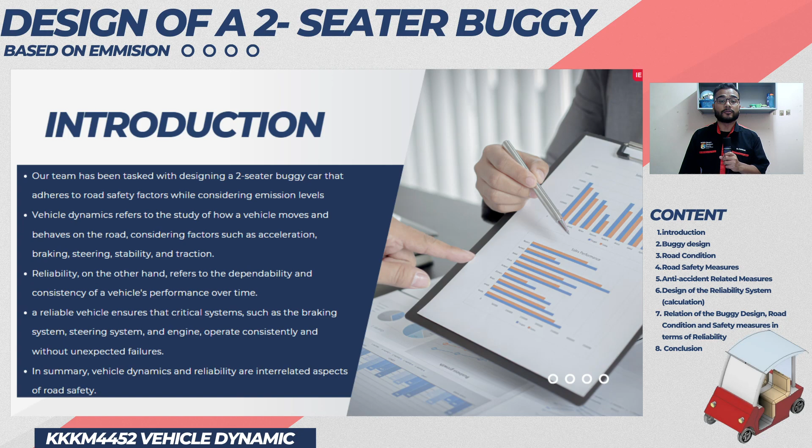The design of the two-seater buggy based on the emission: when comparing electric drive to internal combustion engine, the former has a much lower carbon emission. For a lifetime fuel consumption of ICE, 70 tons of carbon dioxide is released into the atmosphere, whereas an electric car like Tesla only produces 30 tons of carbon dioxide, assuming the current electrical grid in Malaysia.

When in use, electric drives do not produce any emissions, while ICE burns fossil fuel and emits harmful gases such as carbon dioxide, nitrogen oxide, and soot directly into the atmosphere. The carbon emissions associated with electric drive depends on the source of electricity used to charge the batteries.

If the electricity comes from renewable sources like solar, wind, or hydroelectric power, the emissions are significantly reduced. However, if the electricity comes from coal or fossil fuel, the emissions associated with charging the electric vehicle will be higher. It is important to note that by looking at the trend, electric generation is gradually becoming cleaner, with more renewable energy sources being implemented, further reducing the carbon footprint of electric vehicles over time.

The material used to build the frame of the car is made of lightweight materials. By choosing a lightweight material, we can significantly reduce carbon emissions. Lightweight materials such as aluminium, carbon fiber, and high-strength steel require more energy during manufacturing compared to traditional steel frames.

However, it's important to note that these alternative materials can offer weight savings, which can result in improved average fuel efficiency. This fuel efficiency improvement can balance the higher energy requirements during manufacturing, resulting in overall environmental benefits. Lighter frames contribute to improved fuel efficiency and reduce emission during the lifetime usage of the buggy.

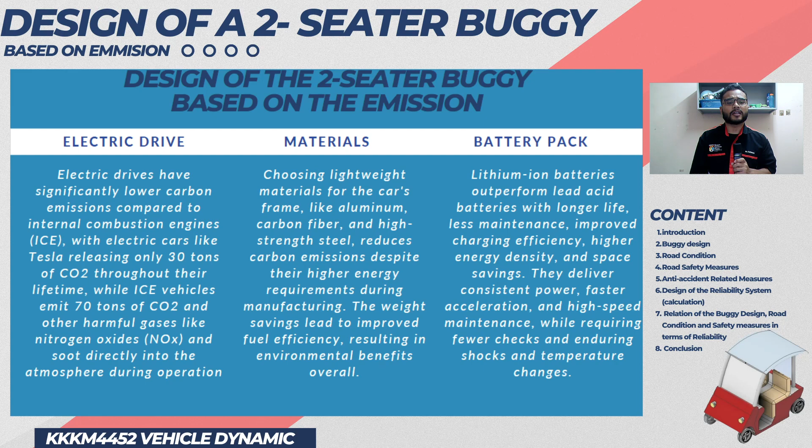Maintenance is also reduced because lithium-ion batteries do not need to be checked that frequently, and the capability to withstand shock and temperature increase are a plus. The location of the battery pack, which is under the seat, also lowers the center of gravity of the buggy, thus improving stability.

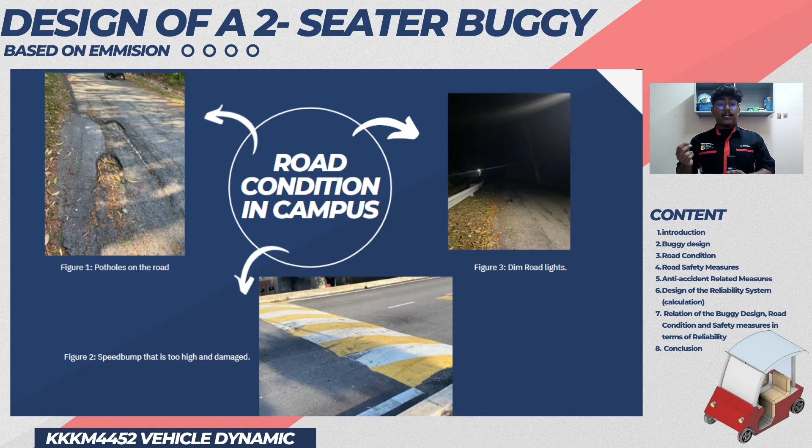Next I'll be presenting about road safety measures by road users and public pedestrians. The first safety measure for road users is obeying traffic laws. Traffic laws are in place to effectively regulate and control the movement of vehicles, leading to a safer and more structured road environment. Compliance with the law significantly contributes to the safety of both oneself and others on the road. Speed limits, determined by factors such as road condition, visibility, and the surrounding environment, should be strictly followed as they serve to prevent accidents.

The second road safety measure for road users is avoiding distraction. Eliminating distraction while driving is an essential road safety measure that greatly diminishes the chance of accidents. Distraction diverts a driver's attention away from the road, impairing their capacity to react swiftly to potential danger. It is crucial for road users to prioritize attentiveness and minimize distraction to ensure a safe driving environment.

The next safety measures are for public pedestrians. The first is to use designated crosswalks. Giving priority to the use of designated crosswalks is an essential road safety measure that pedestrians should prioritize. Designated crosswalks are clearly marked areas on the road that offer a safe and visible path for pedestrians to cross. By utilizing these designated areas, pedestrians enhance their visibility to drivers and assert their right of way.

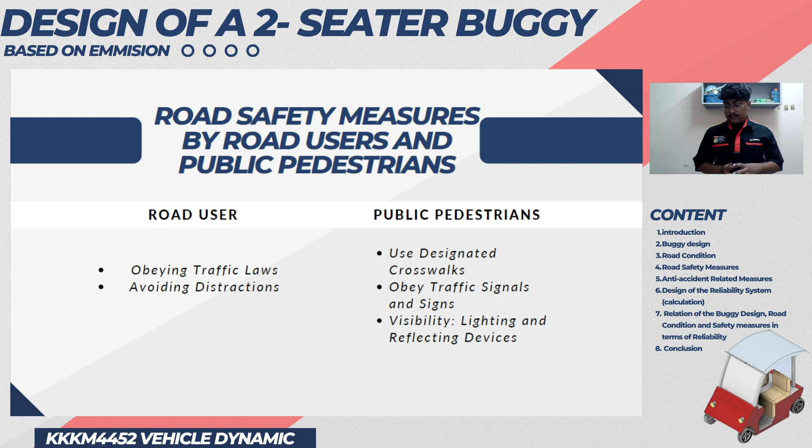Assalamualaikum warahmatullahi wabarakatuh. Today I'm going to present about anti-accident related measures that need to be taken to prevent fatal accidents. The first one is the anti-lock braking system. What is an anti-lock braking system? It is a safety feature implemented in vehicles, including buggy trucks, to prevent the wheels from locking up during braking, particularly in emergency or hard braking situations, thus reducing the risk of accidents.

These particular systems allow the driver to maintain steering control and improve stability while braking, because of the modulation of brake pressure, which keeps the wheels from losing traction and prevents them from sliding.

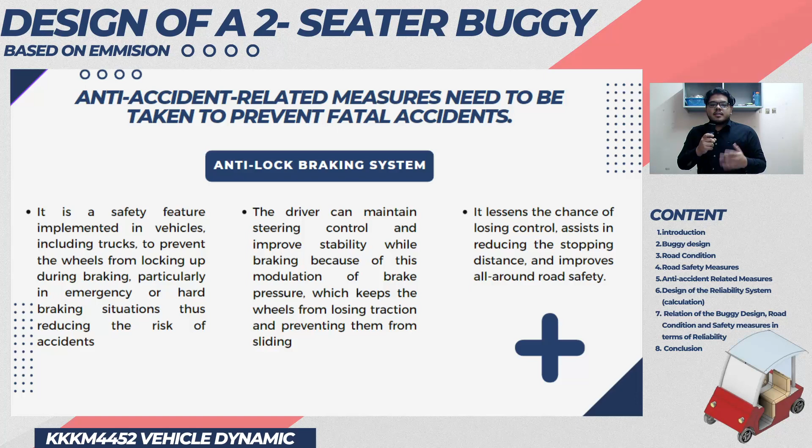It lessens the chance of losing control, assists in reducing stopping distance, and improves all-around road safety.

The next anti-accident related measure is the seatbelt. The seatbelt is the main safety item that aids in protecting passengers in case of an accident or rapid deceleration. By keeping passengers confined to their seats and preventing them from hitting objects or flying out of windows, seatbelts lessen the severity of injuries. Seatbelts are thought of as the first line of defense in preventing injuries and fatalities from traffic accidents.

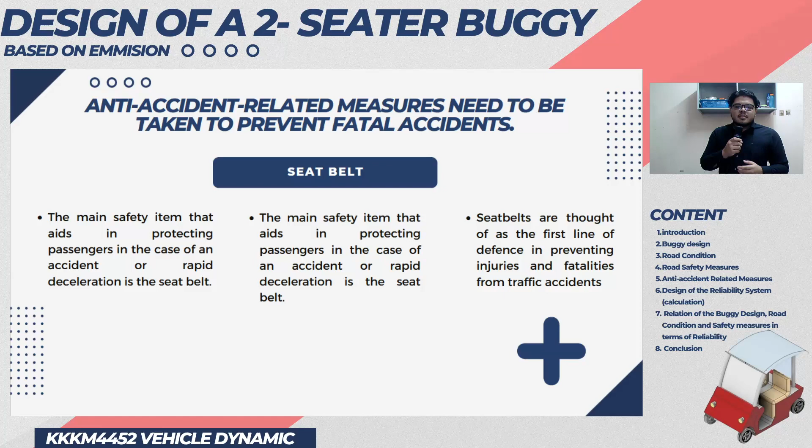Hello, I'm Ikmal and I'll be presenting about the design of the reliability system of the buggy.

Firstly, we have battery cells. We use high quality battery cells from reputable manufacturers that have a proven track record of reliability and performance. For the electric motor, we use high quality bearings that can withstand the loads, speeds, and operating conditions of the motor. Proper lubrication and maintenance of the bearings are essential to prevent premature wear, noise, and failure.

Next, the braking system. We implement effective thermal management to dissipate heat generated during braking. Adequate ventilation, cooling fins, or heat shields can help prevent brake fading and maintain consistent braking performance under high temperature conditions.

For the suspension system, components and their mounting points are structurally sound and capable of withstanding the anticipated loads and forces. Adequate strength, rigidity, and corrosion resistance are crucial for long-term reliability. Lastly, for the chassis, we implement effective corrosion protection to safeguard the chassis against rust and deterioration. The chassis design complies with relevant industry standards, regulations, and safety guidelines.

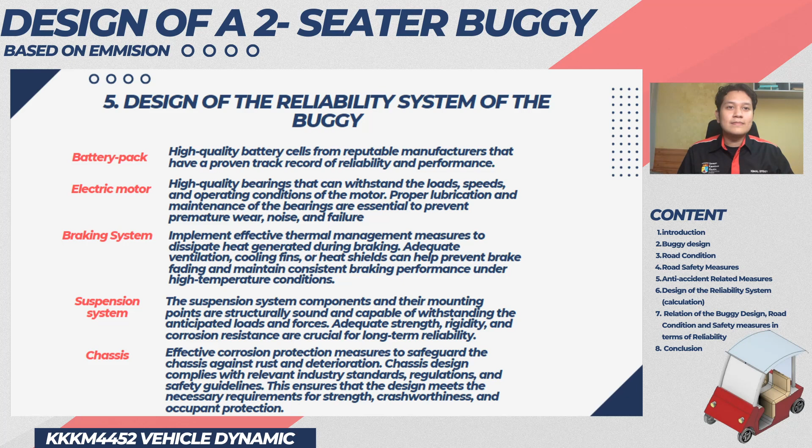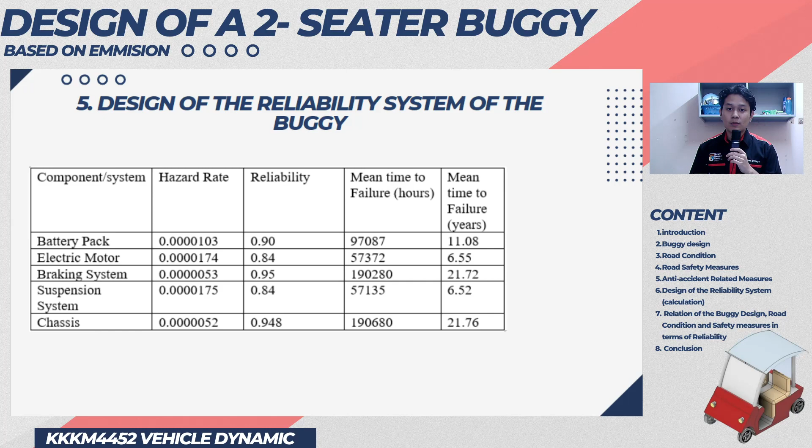Based on the calculation, the braking system and the chassis have the lowest hazard rate and the highest reliability among the listed components. They also have the longest mean time to failure in both hours and years, indicating a high level of reliability. The electric motor and the suspension system need to be further improved to mitigate the impact of potential failure.

Now I'm going to present about the emission of the buggy truck in relation to reliability and vehicle dynamics. The combustion efficiency of a truck's engine has a direct impact on emissions. The engine may not run as efficiently due to emission-related problems, which can seriously affect how reliable the truck is. The first relationship is the emission control system.

Effective combustion of the fuel in the engine is ensured by the emission control system. The combustion process may be interfered with when certain parts break down or become faulty, resulting in incomplete combustion and higher emissions. The next one is engine misfires, which happen when the fuel-air mixture fails to ignite properly in one or more cylinders, and can be caused by an ineffective emission control system. Engine misfires can increase stress on engine parts and could cause premature wear and decreased reliability.

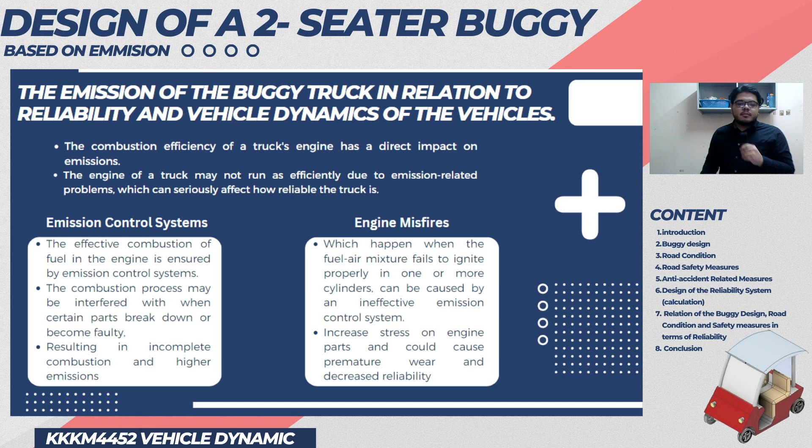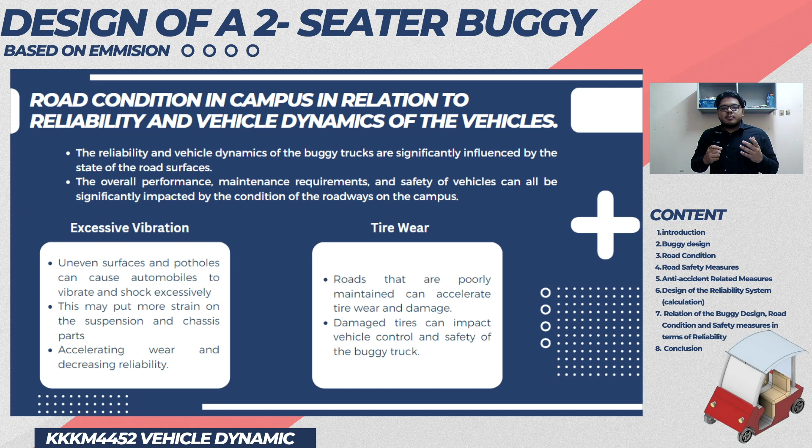The next one is tire wear. Roads that are poorly maintained can accelerate tire wear and damage. Damaged tires can impact vehicle control and safety of the buggy truck.